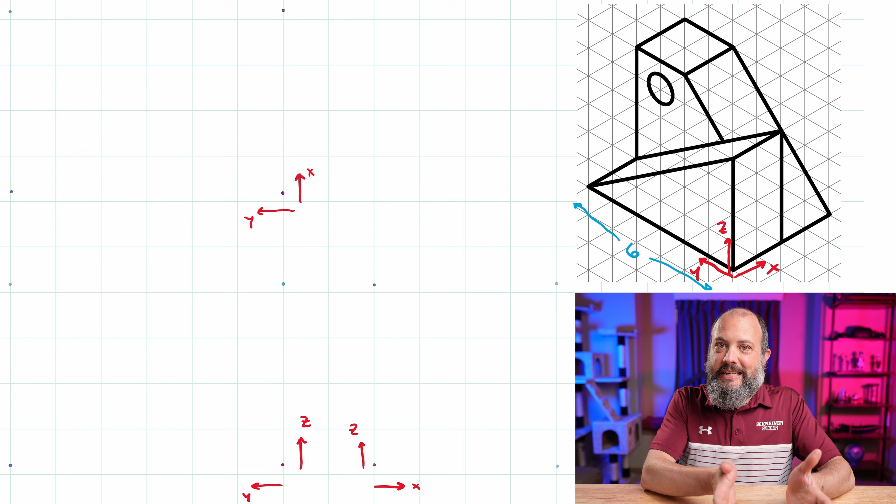So I establish XYZ coordinate axes. My length in the Y direction is 6, so my front and top views will be a width of 6. The height from the very bottom to the very top of the drawing is 4, so the height of my front and right side views will both be 4. And that 4 also represents the depth into the page in the X direction, so that dimension is going to be the width of my right-hand view and the height of the top view, because it's sort of reflected across the miter line, which I didn't actually draw, but you get the idea.

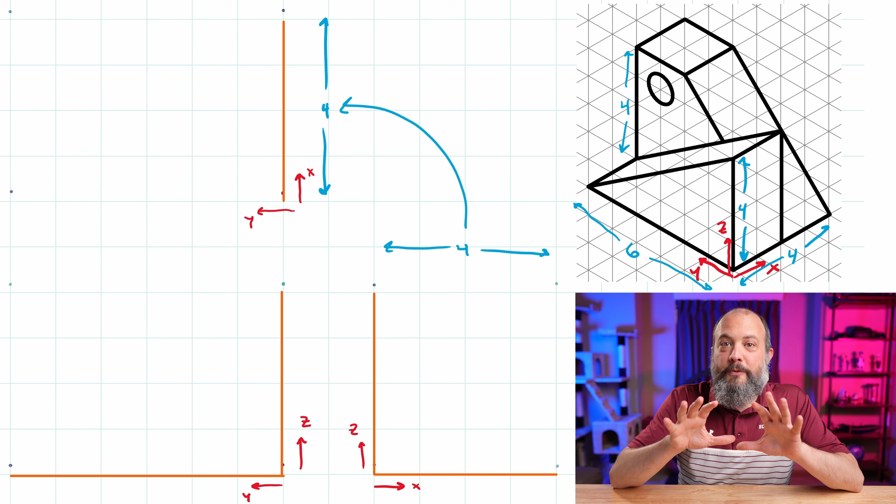Front, right, and top side view bounding boxes, I drew them in orange to symbolize drawing them very lightly because they might get erased later on. This isn't necessarily part of the final drawing. I'm just drawing it to make sure that my final drawing will actually fit on the page, be the right size, and generally centered.

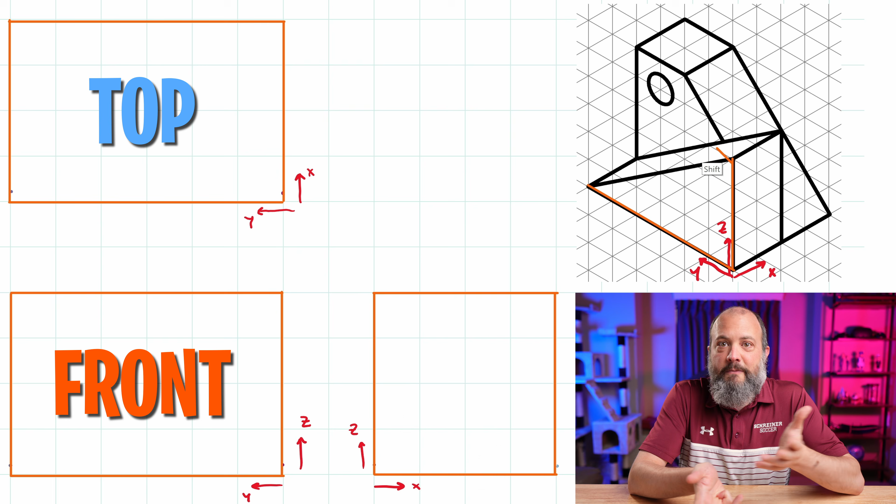So if you're given an isometric view that looks like it's not super tough, my recommendation would just be pick one of your 3, front view, top view, right view, just pick one and just finish it completely. And you do that by starting, so if you're on the front view, start from the front and just work your way back, drawing all of your visible faces first, and then your hidden lines afterwards. So on the front view, the front flat, big visible face is this big triangle. So that's the first thing I would draw, since that's the frontmost thing from the front view.

And then I'll draw my visible line on top of it, and I know the visible line stops when it hits the edge of that triangle. And since I already know that the rest of the line will be hidden, I'll go ahead and finish the line as a dashed hidden line the rest of the way.

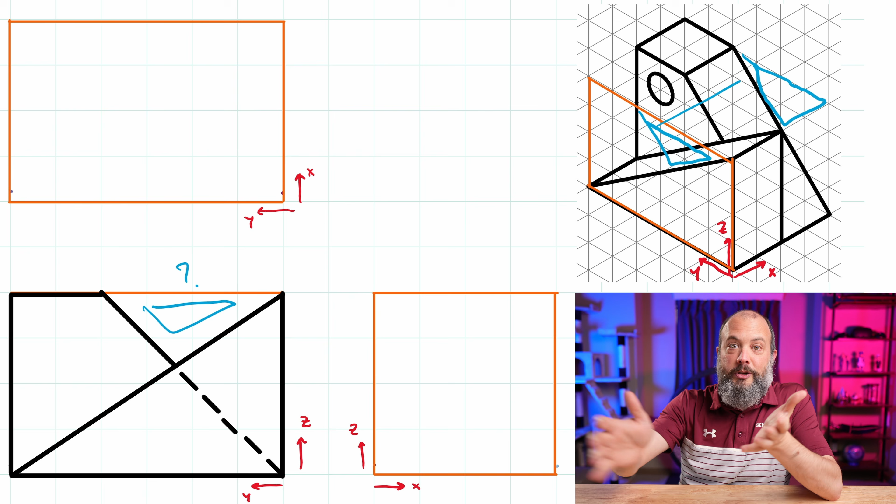Okay, so there's one part of my front view where there's nothing there yet, this blue triangle. But looking up at the isometric view, you can see that that actually is a cutout. It's a hole that goes all the way through. So this is just gonna remain empty. But there is another actual hole that I still need to draw as well.

And drawing circles freehand without an actual tool is pretty tough, as you can watch me kind of struggle through here. The most important thing is to make sure that the center is in the correct location, and then to mark your 4 quadrants, up, down, left, right, with the correct radius.

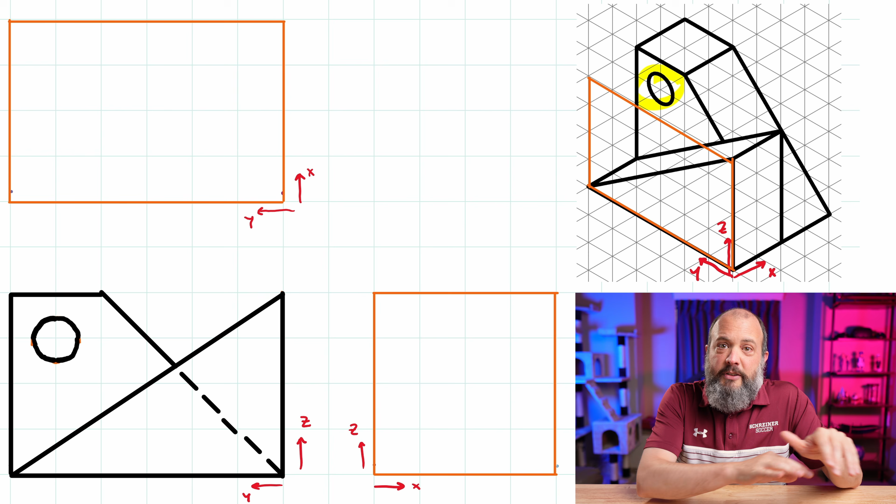And as long as your circle sort of fits within that radius and touches those 4 quadrants, that's probably gonna be good enough, or about as good as you can do if you're drawing freehand. Now, if you have a compass or a circular tool, that's gonna be way better. You can draw an actual circle.

And for a small circle like this, to finish off the center line, I'll just draw a small little plus in the middle, and then extend lines outwards, up, down, left, and right out from there. Right, center line should be a long, short, long, where I have the 2 short sections cross right in the middle, and then the long sections on either side.

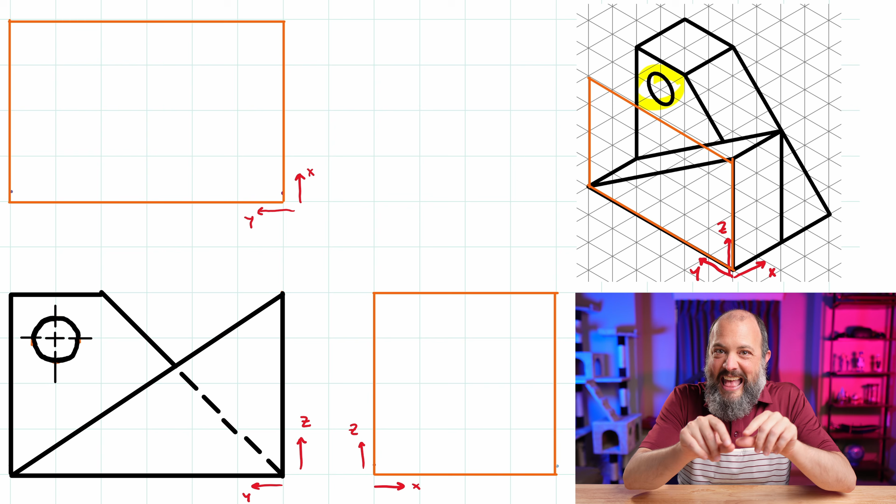Most common mistake for center lines is to end the center line right at the edge of the circle, right? Center lines, though, should actually extend past the edge of the circle. There's no set distance as to how far past it needs to go, just a little bit, whatever looks good.

Moving on to the top view, we'll start off by drawing the flat square that's actually touching the very top of this shape. And this blue angled surface, right, this slanted face would also be visible from the top. So even though this line is at an incline, it just appears as a regular rectangle on the top view. Because the top view doesn't show depth, right? It's just a 2-dimensional view.

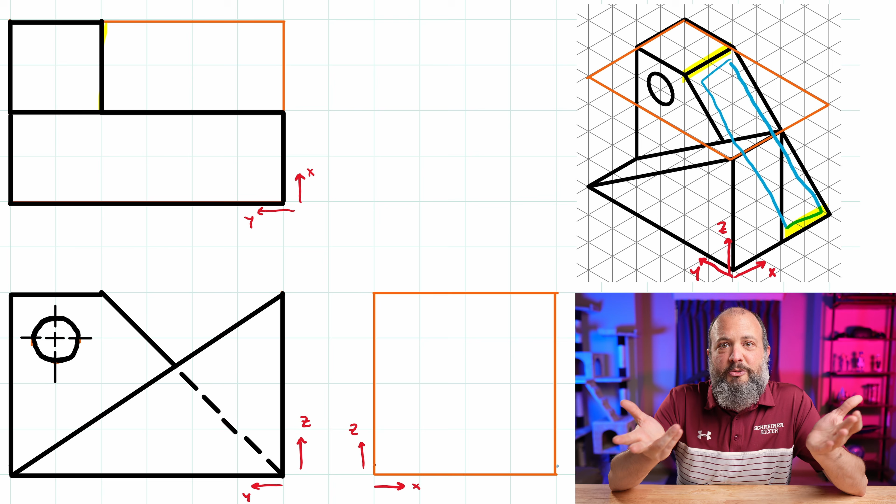All right, this second blue rectangle that's kind of behind the first one will also just appear as another regular horizontal rectangle on the top view. Last thing is going to be the circular hole. So a horizontal circular hole like this one only looks like a circle from the front view. On the right view and top view, it's just going to look like a rectangle.

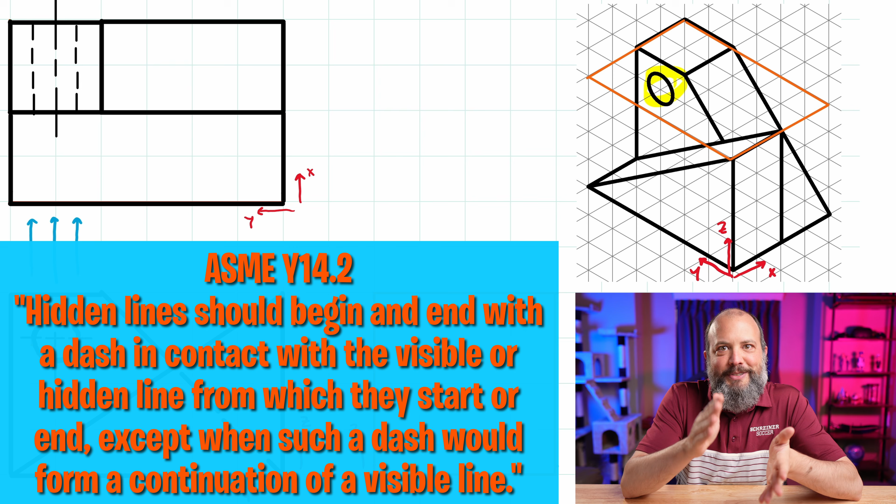So I draw hidden lines to mark the very left and right side of the hole, and then a center line just right through the middle. The hidden lines start and end with the dash, so I actually have the dash part of the dash gap line starting at the visible lines.

But the center line, right, long, short, long, the long sections will cross the visible line. They don't stop right at the visible line like the hidden lines do, they extend past it. No set length for how far past it has to go, just choose kind of whatever looks good.

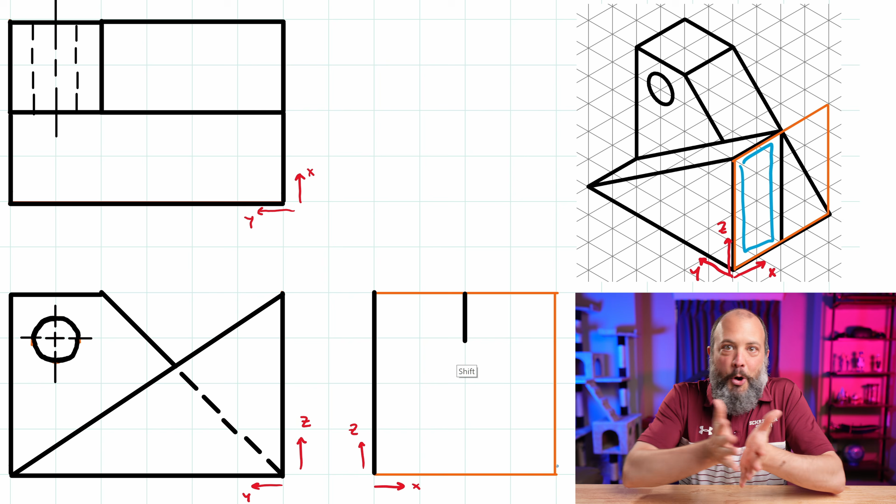Right hand view next. On the right side, there's a big flat rectangle that's butted all the way up against the right hand side, so I'll draw that first. Then this blue slanted surface next, right? It's an angled face, but from the right hand side, it's just gonna look also just like a regular vertical rectangle.

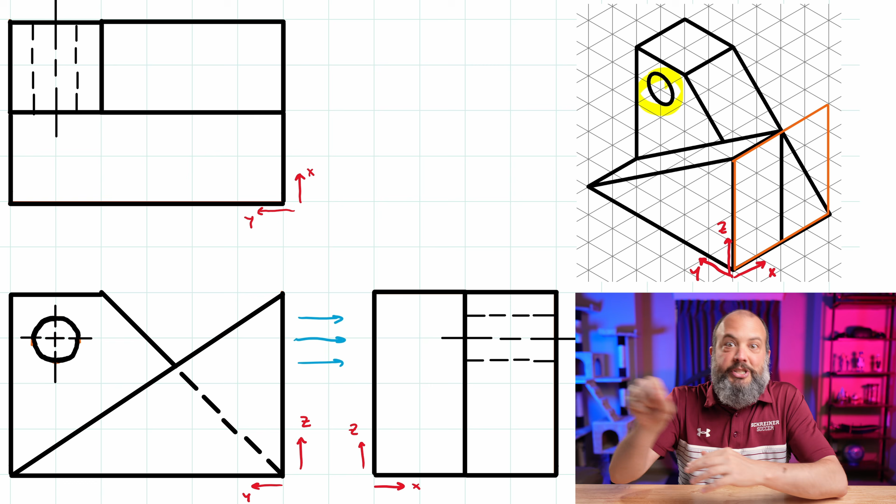The round hole does go through that inclined surface I just drew, right? It doesn't go across the entire piece, it's only through the right-hand side. So I'm gonna line the hole up with the front view, right? It's at the same height. So the very top and bottom are gonna be marked with hidden lines, and then a center line, obviously, right through the center.

So erase all of your construction lines, and I'm also erasing and redrawing my crooked dashed line on the front view. I'm also making the lines a little bit thinner. It's sometimes hard to control with a pencil, but hidden and center lines should be drawn thinner than visible lines. Visible lines should be the thickest, darkest lines on your drawings. Hidden and center lines should be a little bit thinner.

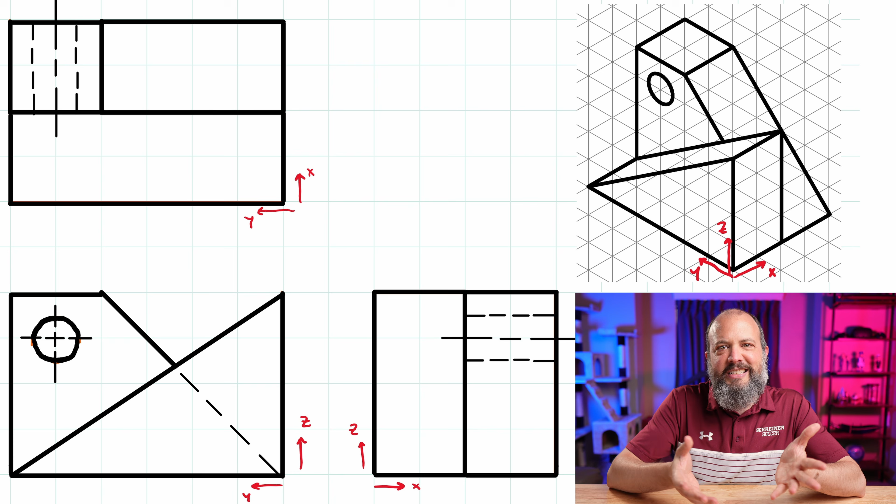Again, hard to do with a pencil, but since I'm using software, I can just change the thickness of my pen and make them a little bit thinner. And that's it. That's the completed front view, top view, right side view, right? Final orthographic projections for this given isometric view.